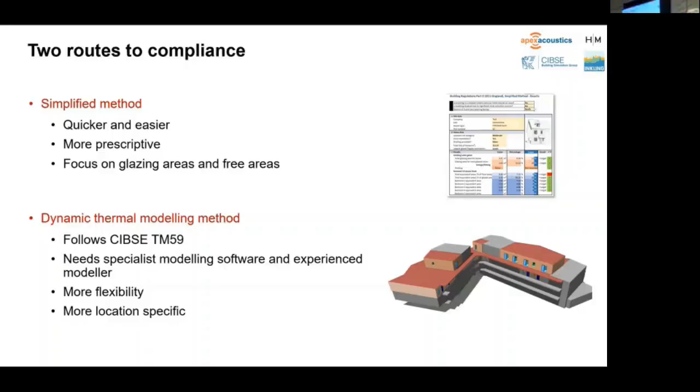The alternative, and we'll cover these in a bit more detail going forward, is the dynamic thermal modelling method, so it follows the CIBSE TM59 protocol. It does need more specialist modelling software and an experienced modeller to run that software, but it affords a lot more flexibility. It's more location specific, and we'll see there's a few other key advantages that come with doing things that way. Obviously, it is potentially a lot more expensive to do those sort of assessments.

There are a number of additional requirements within Part O that I think even as modelers it's really important to be aware of, because they do have an impact on the modelling assessment.

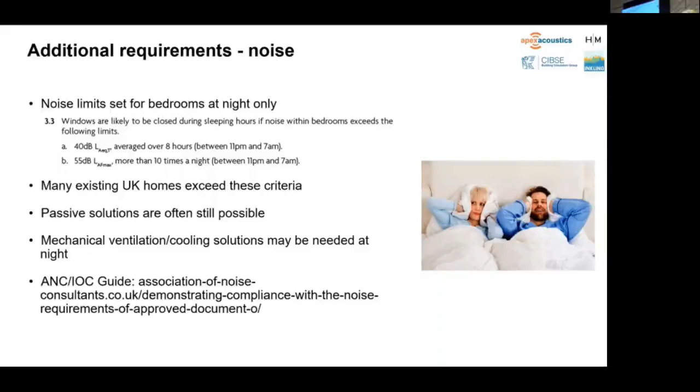On top of the noise, there's additional requirements around security. Windows relied upon for nighttime ventilation need to be secure - that's bedroom windows that are accessible, so ground floor bedroom windows in particular you'll need to pay extra attention to. Likely solutions include fixed lockable louvered shutters, grills, railings and so forth. But as modelers, we need to take into account whether those impact the ventilation potential of those windows - what does that do to the discharge coefficient and so forth. So we need to account for that on windows affected, but it's predominantly just bedroom windows, and I think during the day as well, because they're going to be fixed.

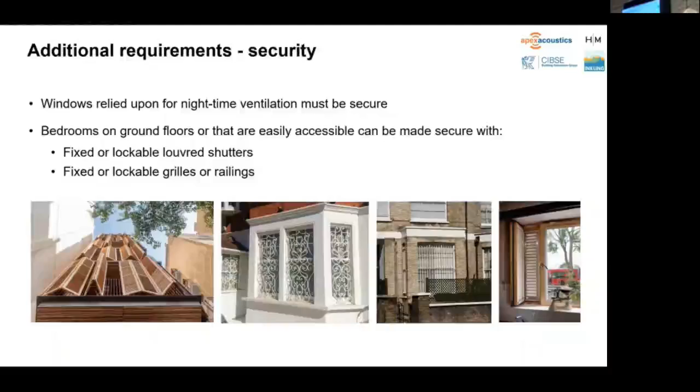Another one on top of all that: protection from falling. With good reason, there are some additional safety requirements, although it's questionable why these are different to what's in Part K, which is traditionally where we keep all the health and safety parts of building regulations - for some reason these supersede Part K. There is a limit on how wide windows can open, including ground floor windows. You need to measure from the inside face of the wall to the handle of the window - it can't exceed 650 millimeters. The window can technically open wider than that, but you can't include in the model or in any of your assessment an opening that would exceed that limit, because it's based on people falling out of the window as they open it too wide or reach to close it. It's well motivated, but fiddly to apply, and I think Ben's going to cover in more detail how we might go about that as modelers, to make sure we capture it for every window.

In addition, this doesn't so much affect the modelling, but is worth flagging to clients: any sill heights lower than 1100 millimeters - and that's going to be quite a lot based on current designs - for upper floor windows, or where the inside to outside height difference is more than 600 mil. The sill height needs to be at least 1100 mil, or there's a tolerance of minus 100 mil if it's a means of escape, because the fire regulations require means of escape to be lower than 1100 - though I keep forgetting the exact numbers. There is a slight tolerance, because the house builders lobbied for it very hard. In addition, you can use guarding - if you've got an opening lower than that, it needs to be guarded to make sure 1100 is the safe limit.

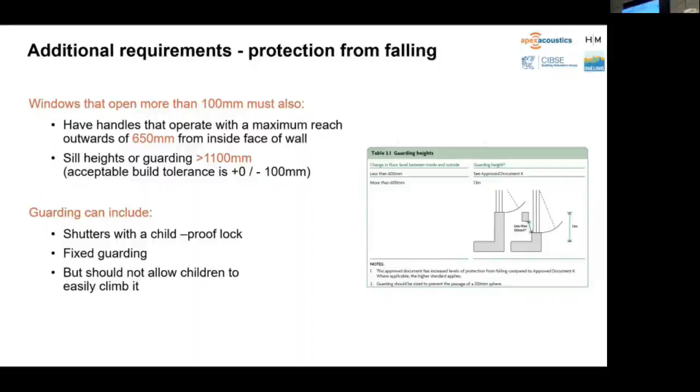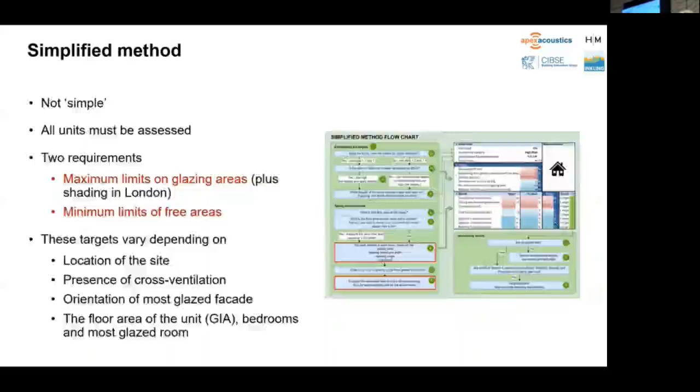So I need to rattle through this, I forgot to set my timer. The simplified method, as I said, it's not that simple - you have to assess every single unit in a scheme. There are two key requirements: a maximum limit on the glazing areas and a minimum limit on the free areas, which vary depending on the location of the site, whether it's cross ventilated, and what orientation your most glazed facade faces, etc. You also need to take quite a lot of detailed measurements for each unit and each window, including the glazed area and the sash area - the pane of the window that opens - how big that is, the floor area of the room, the GIA for the whole house, and so on.

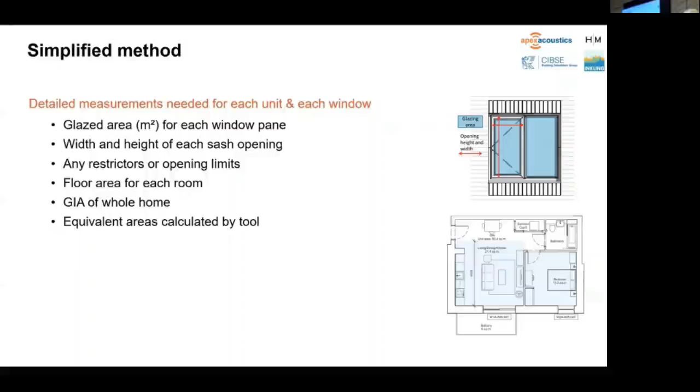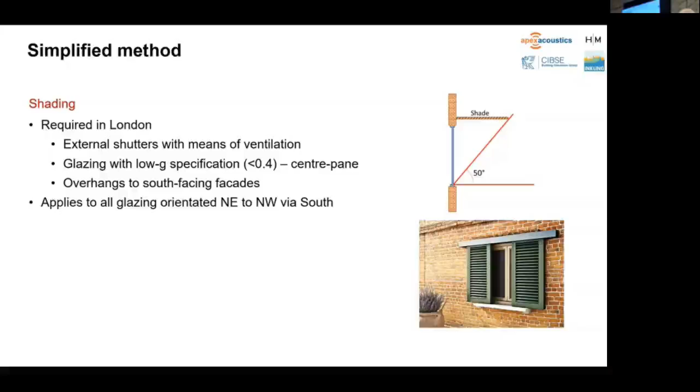The good news is, shading - everything in London needs additional shading under the simplified method, which could be external shutters, low G glass, or an overhang. The good news is the Future Homes Hub have produced a spreadsheet, free to download, that will take you through that calculation step by step, asking all the questions - you fill it in diligently, and it spits out the answers.

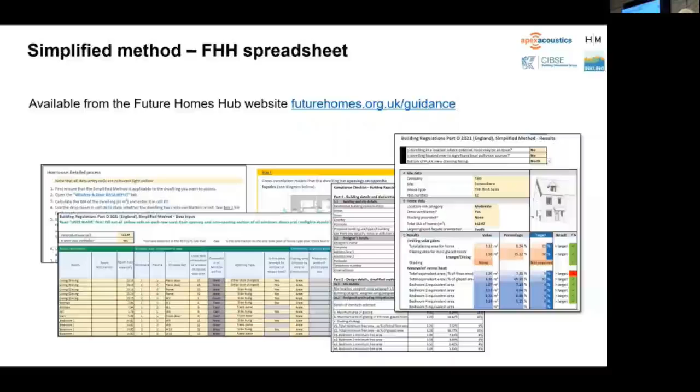And that, as we'll come back to later, has a little calculator that does that 650 mil reach angle check. You can use that to help feed into your dynamic model if you want to, and I advise that you might.

The alternative to the simplified method, and what we're going to talk a bit more about today, is the dynamic thermal modelling method. So that's my bag. I'm a TAS modeller, and I was one of the authors of TM59, so I'm quite embedded in it.

The advantage of using this route through building regs is that you can assess a sample set of units, so you don't have to do every single one. I've got a slide on how you might select that sample sensibly. It's based on CIBSE TM59.

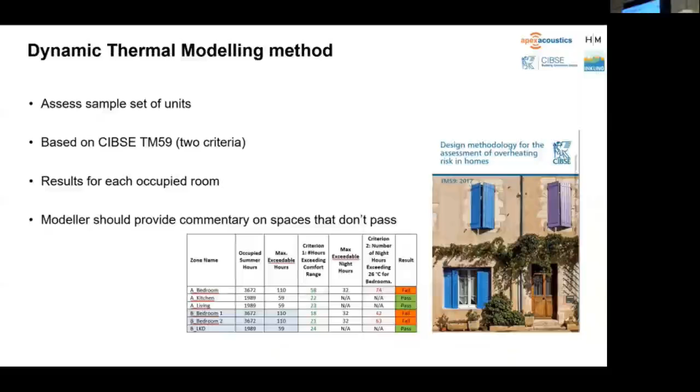There are two criteria. You get results for every occupied room—bedrooms, living rooms, kitchens, etc. As a modeller, you should be providing a commentary on any spaces that don't immediately pass those criteria: which criteria it fails, why that might be, and what mitigations might be suitable to enable a pass.

When it comes to selecting a sample of units—I realise I'm rabbiting on, but we've got a lot to get through—the key thing is to select those that are likely to have the highest risk of overheating.

You're not going to get away with picking all the ones around on the north side of the building that are right near the ground floor and really shaded. That's not cool.

Ideally, you want to be picking one of each unit type: units that have the most solar exposure, the biggest glazing area, or the least shading from surrounding buildings or other features. Also areas that might have constraints to window openings—noise, pollution, whatever reasons you might not want to open windows, security on the ground floor.

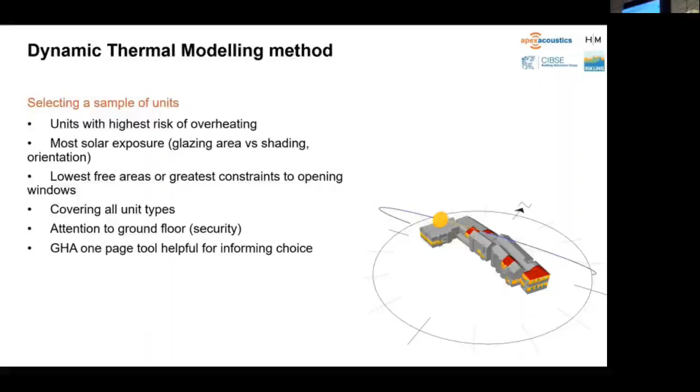There's a Good Homes Alliance one-page tool, again something I've written, which is free to download from their website. It summarises in one page the key risk factors for overheating in homes. If you're unfamiliar with what they are, a quick look through that might help you understand where in a scheme the key risks are, and then help you pick your set of units, flagging up more of those red flags.

Other advantages of using the dynamic thermal modelling method are that you choose weather data local to the site. As anyone who's explored a particular set of units and run them through various different CIBSE weather files will attest, outside of London is way easier to pass than inside of London. There's a really striking difference, which is useful for sites well outside London, but immediately causes an issue, particularly for Heathrow, which is the worst case weather file.

Just for anyone who hasn't already picked that up, Heathrow is a real challenge. You do need to use the CIBSE 2020 high emissions 50th percentile DSY1 file—that's the key one you need to pass against. So again, as modellers, you should be familiar with that and have access to it.

There's a spreadsheet that CIBSE have provided for Part L—if you're in doubt about which is the best weather file to use, you put in the postcode and it tells you what the CIBSE location is. You can download that from their website.

Advantages of the modelling method: natural ventilation is much more accurately reflected using the models. It's not perfect, but it does take into account cross ventilation, the shape of your windows, discharge coefficients, as we'll see, and the local weather file—so on a windier site, you'll get more advantage to opening your windows.

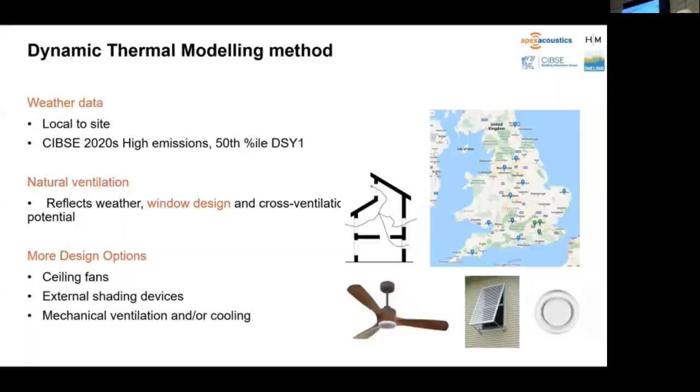Mechanical ventilation and/or cooling in various different guises can be included to model the benefits and effects those could have on the results. So quite a lot of options. In terms of differences between the original TM59, vanilla as we're trying to call it, and the Part O requirements, there are some changes, irritatingly, that they've made.

Mostly around window openings. Now they've required that windows open gradually when internal temperatures exceed 22 degrees, windows start to open, and they're not fully open until internal temperatures are above 26 degrees. They've also required that bedroom windows are open all night if the bedroom exceeds 23 degrees at 11 p.m.

And until recently, we couldn't actually do that in a lot of models. So I don't know how they tested it, but now that's been implemented - I know TAS and IES have implemented that, so it's possible.

It does some weird things to results, but you can sort of see the logic there. People are going to bed, they don't want to wake up in the night to alter the windows, but I think it's arguable that if you were hot in the night, you might get up and open the window.

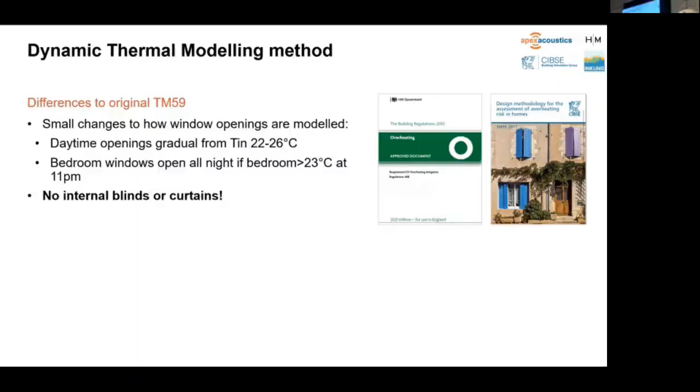It's either way. But the really big hitter here is that the approved document does not allow you to include blinds or curtains in your model, and that historically, particularly in London sites, was one of the big last resort things - you could add in some internal blinds, and yes, you had to include them in the build, but they would help you pass your TM59 assessment. No longer. So this is going to be a challenge.

I'm nearly finished. Whatever method you follow, simplified or dynamic, there are reporting requirements that need to go to building control. The Future Homes Hub spreadsheet has a template inside it for the simplified method results, so that helps you populate. But if you're using the dynamic modelling route, you need to complete a proper modelling report. There's a list of what needs to be included inside it, and that has to go to building control together with your results.

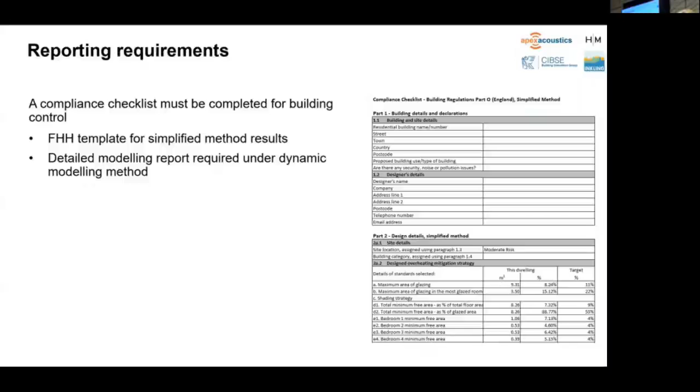So, which method? It's a balance. The simplified method does have some advantages, but what I'm finding as I'm applying it is that there's quite a narrow band with which you can comply. There's a real narrow sweet spot between having too much glazing and not enough free area, that it is quite challenging.

So I think a lot of house builders are running their standard units through the simplified method and going, oh, it fails. Do I want to make loads of changes to it, or do I want to run it through the dynamic modelling method? Let's try the dynamic modelling method and see if we can get past there. Often they can.

So I think there's a lot of work out there for modelers, which could be a really good thing, but we're going to have to really get our act together, be consistent, do a really good job on these models and make sure that we're doing them right. So hence this talk today. So pros and cons to both, but I would argue that we're going to see a lot more modelling, and that's not just my bias.

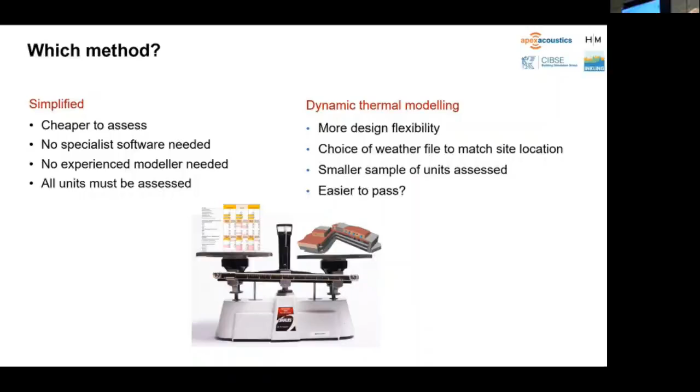There are a lot of resources, and it's building - there's going to be more and more out there to help you. The Good Homes Alliance early stage tool that I mentioned before, free to download. CIBSE TM59 you can get from the CIBSE website. The Future Homes Hub guidance - I wrote with Julie Godefroy a couple of pieces for them that are, again, free to download, technical guidance that takes you through the nitty-gritty, mostly the simplified method because it's for house builders, but it does cover TM59 as well, and all the detail of what you need to do.

Jack's guidance, which he will come to later as well, on acoustic and how you measure the noise on site and how you respond to that. There are FAQs on the DLUHC website, where they've published the building regs. We're not convinced they're the questions most frequently asked, but they do augment some of the guidance in the approved document, which is very scant. And I've written a number of blogs now for the Inkling website, so check us out. There will be a fourth coming quite soon with some of the content from today.

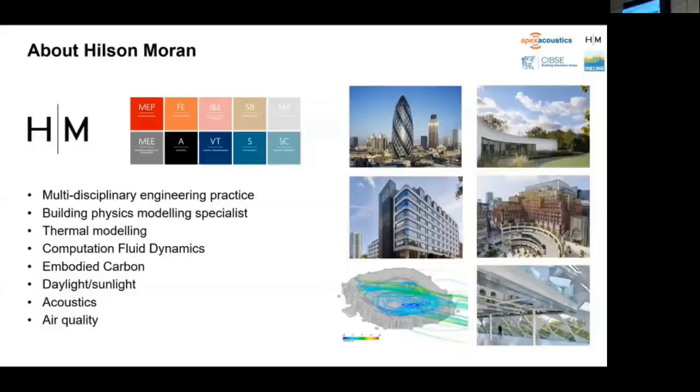What I want to cover today is, I think one of the important bits, is how we model the openings in our buildings, how we model the windows, and how we get some consistency, because there are many approaches you could take. There are many inputs in the modelling tools, and there are many ways that you could come up with different answers, whether they're right or wrong. I think it's important as a community that we try and come up with either a standardised approach, or an approach that we can all agree on.

So I'm going to go through some of that and give our collective opinion. Me, Susie, and Jack have been mulling this over for a week or two at least, trying to come up with what we think is a sensible way forward.

The first thing to look at is the fact that there are many definitions for what we call the opening bit of the window. So we have free area, equivalent area, and effective area as the three key terms. Depending where you look, you'll get different definitions, even between the building regulations - even between Part O and Part F there are differences. And if you look wider, there are many papers written on this subject, so it's very confusing.

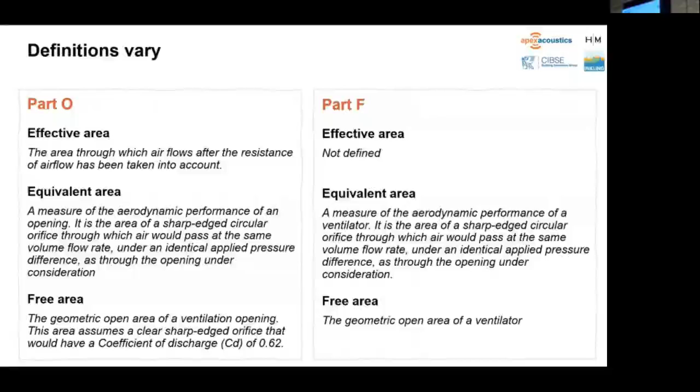As a community, we want to really work out how we should best approach this. So I'm going to quickly spin through these, outline them, and then go through what we think is a sensible approach for our modelling inputs.

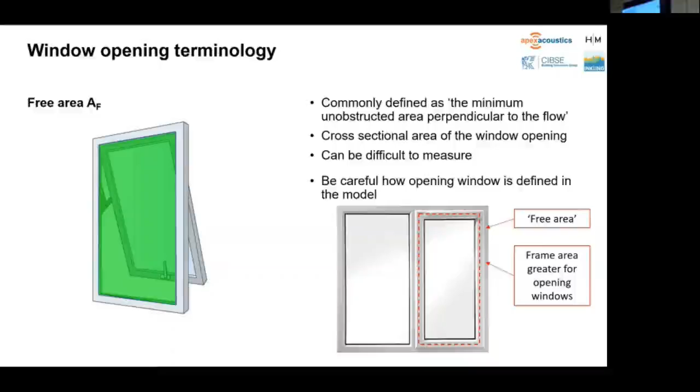Free area is literally the hole - not the bit around it. It's, you know, when you open the window, it's the whole bit. And that's very often difficult - people define it different ways. But also the thing to think about is it is the hole. So when you open a window, as in that image on the bottom right, the sash area, when you open that you'll have some frame that overhangs the hole. So when you are entering that into your model, what do you put? Because your window in your model might be the pane and the frame, and the opening bit might just be the pane bit. So you have to think carefully how we input the data into the model to correctly represent free area.

The next thing we look at is effective area. Effective area is that free area times the discharge coefficient. The discharge coefficient is just a way of looking at the aerodynamic interference that all the bits of the window contribute to air coming in through that hole - whether it's a top hung window, side hung, etc., and they will perform differently for different types of window. So the discharge coefficient has to be calculated for each window type, for each opening angle setting for your window. It's very difficult, on the face of it, to work out what that discharge coefficient might be, so you have to do it via experiment. From that graph, you can see it varies for different opening angles, for different ratios of width and height of that window. They all tend, when you get to a fully open hole, to a discharge coefficient of about 0.61 - that's the accepted norm around that value. So whether it's a square, a rectangle, or even a circular hole, they will tend to that sort of value. But as you move away from that, it varies, and you need to come at that by experimentation.

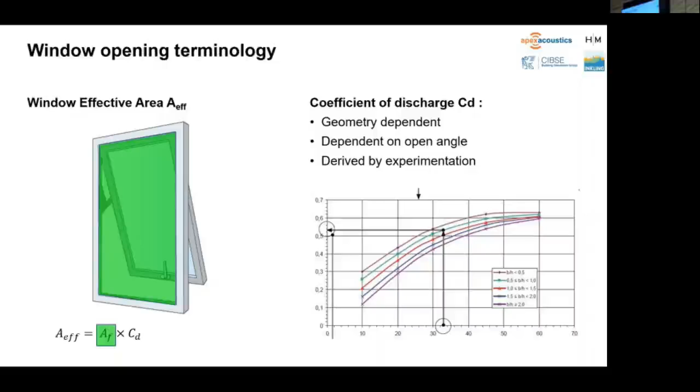So equivalent area is just an extension of effective area - you're dividing your effective area by that maximum discharge coefficient of 0.61. But an interesting point is that Part O actually says, when it says free area, it's actually talking about equivalent area. So it's confusing even within Part O what free area actually means. We need to generate some clarity about what terminologies we're using where, what they actually mean, and what value you use for that in your model.

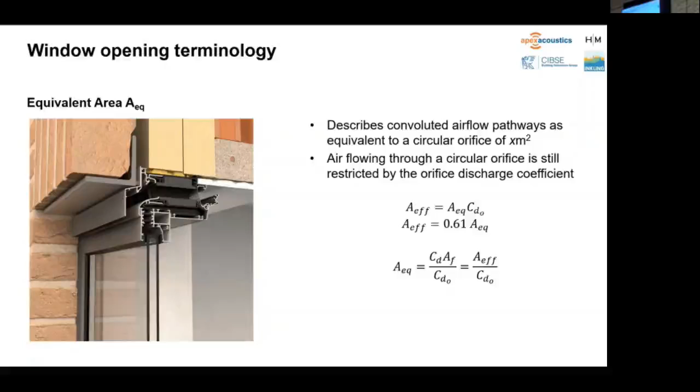So there's a great little tool on the government website under the Building Bulletin 101 schools calculation tool. It's a little coefficient calculator. So you put in the width and height - the yellow ones at the top are your entry boxes. So width and height of your opening, the opening angle of your window. Obviously, if it's a sliding window or something like that, you'd put 90 degrees, it's fully open, and that generates your equivalent, your effective area, and your free area, which is obviously just width and height, but it also calculates the discharge coefficient for you.

In discussion, we've come to the conclusion that free area and discharge coefficient are probably the most pertinent figures to use in your models, because equivalent area and effective area can be misinterpreted, whereas free area is fairly easy to measure - you just measure the size of the opening, and the discharge coefficient is spat out from this. I would say this tool is basic, but there is work going on to improve it to get better accuracy.

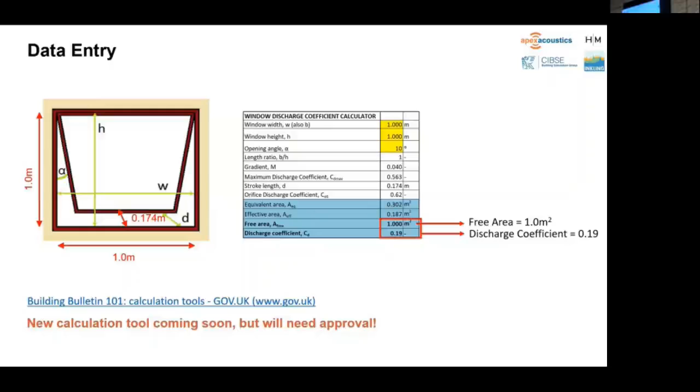The other advantage is if you use discharge coefficient and free area, that is common in all three modelling tools you can use. TAS, IES, Design Builder all have discharge coefficient - they all call it discharge coefficient. They all have something which is effectively the free area: TAS calls it a factor, IES calls it an openable area, Design Builder calls it glazing area opens, but effectively that's your free area.

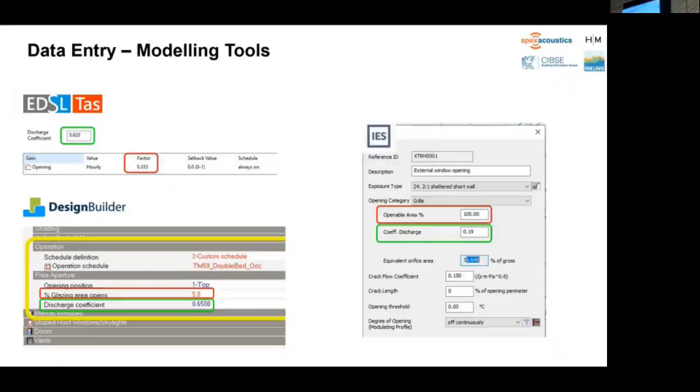Most of the tools have other options, but there's other stuff behind that - in IES there are many options, you can select different window types, and there's probably good research behind all that, but it's not quite as transparent as this. So in terms of consistency and variation between modelling tools, we think that having an openable area and discharge coefficient is the most transparent way of doing that.

And I said there was some research going on. Patrick Sharp and others at Nottingham, Ben Jones and Chris Iddon and others who are known to the building simulation community have published an excellent paper on this, looking at developing a better model for window opening. They've taken the standard BB101 calculator I've just shown you, done some other physical tests and modelling, and come up with this statistical effective area modelling tool, SEAM, which is getting much better correlation, much less error in its prediction of window openings.

At the moment, this isn't an official tool - unlike the BB101 calculator, which is on the government website, this tool isn't released yet. But obviously if we have something that's a bit more accurate, it'd be great to get that officially stamped so we can use it. If you're interested in this, that paper is excellent and goes into all this detail.

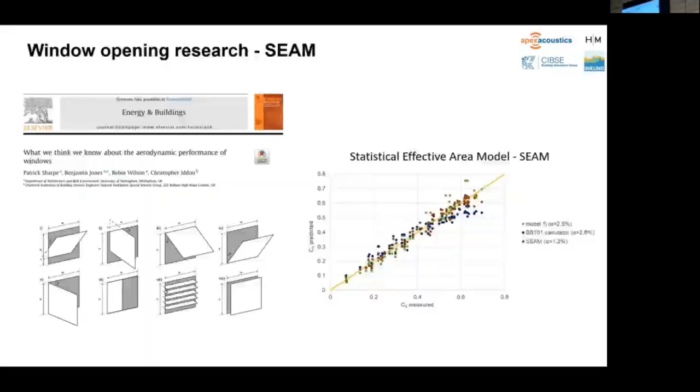And to pick up on Susie's point, we don't want people falling out of windows - there is that 650 limit, so when you're doing your calculations, make sure you take account of that. Susie also mentioned that in the Future Homes Hub there is a spreadsheet which also calculates discharge coefficient for you. It takes into account all those factors, making sure that 650 reach is complied with, and it works out for both day and nighttime conditions. So that's another resource - you want to double check you've calculated discharge coefficient correctly from the BB101. It's a similar tool, it will also help you look at that.

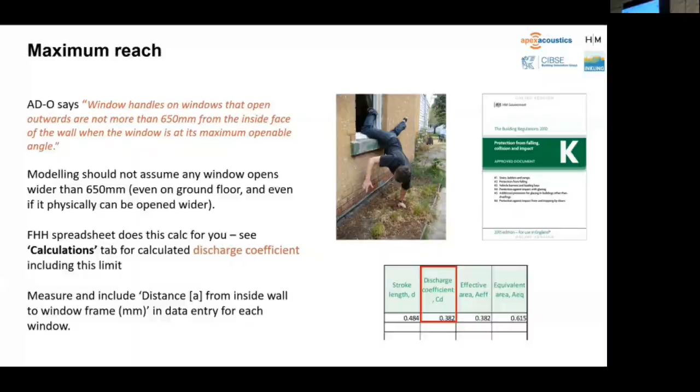Jack will cover this in more detail, but obviously with noise exceedance, you can do your modelling with your window openings, but you still have to comply with noise criteria. Nighttime is the key one - make sure you talk to your acoustic consultant and work with them in tandem. I think gone are the days where you could do overheating assessment with the windows open and submit your acoustic report with the windows closed, and they would both get ticked off. Most local authorities are wise to that now, and that's not the sort of practice we want to encourage anyway.

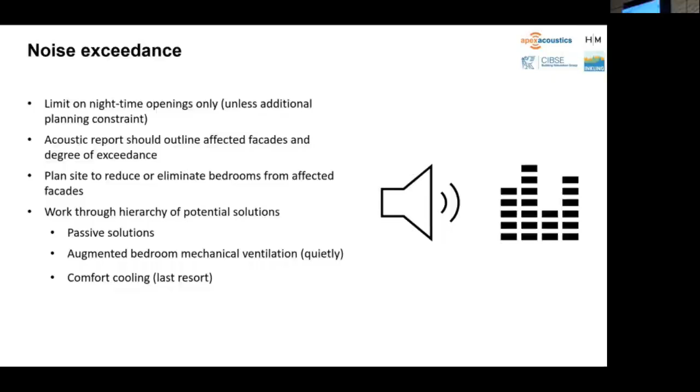So we want to do all that, and just looking through the hierarchy of stuff: passive first, adding additional mechanical vent where you can't quite get that, and then resorting to comfort cooling as a last resort.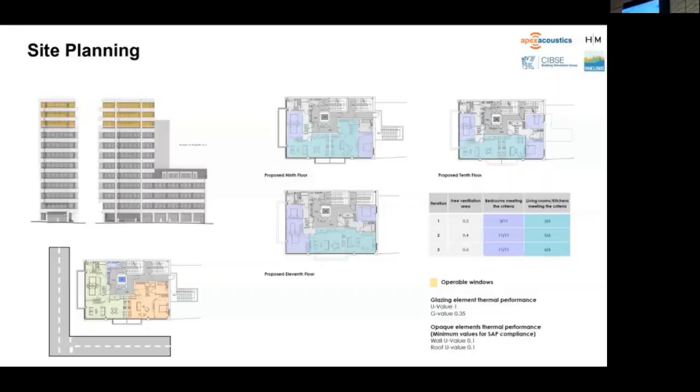If we do have to go to comfort cooling, what we've been looking at recently in another project is, can we offset some of that heat? So in this case, we're using the rejected heat from the space. We're taking the heat from the space and using that to heat our hot water, which is better than dumping it to atmosphere. So you're actually getting a benefit.

Again, that sort of area in building regs is a bit unclear about how that crosses over, because you're taking useful heat from the flat and translating it into your hot water. Hot water is always needed.

The things to look at here: we've used a more realistic hot water profile than you'll see in your NCM internal conditions, and also matching the loads. But also, if you're using the TM59 internal gains, which were designed for stress testing a passive design, that might not be appropriate for sizing your hot water, because it might give you an overestimation of the hot water load you might derive from that shift of heat from the space to your hot water.

So the process you should go through is: test that passively first, see how far you can push the apartment before you start moving towards comfort cooling or something like this, where you're trying to load shift heat away from the space into another use.

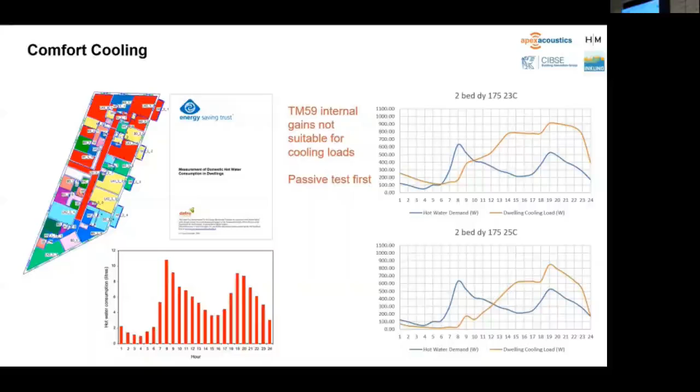Hi, thank you, Susie and Ben, for the invitation here as well. So, my name is Jack Harvie-Clark. I'm the founder of Apex Acoustics. We started just me, we're now 25 people. We do acoustics and air quality. Offices in London, Midlands, North East and Manchester.

This question of noise and overheating, and noise and ventilation, is something that I started nearly a decade ago when I wrote a conference paper about it. Because, as Ben mentioned, we used to do acoustics entirely separately from how ventilation was considered or mitigating overheating. Trying to integrate those things together is a difficult and painful journey that we're all on now together. So, not to share the pain, but to share the difficulties we're facing.

One of the key difficulties is how we describe the performance of the facade. Ben's been talking about the openings for the ventilation performance, and I'm going to talk about how we understand those openings for acoustic performance. And you'll see, hopefully, why it's so important that we make the same assumptions about what the facade is, how it's performing, what an open window is, because it's not easy to understand.

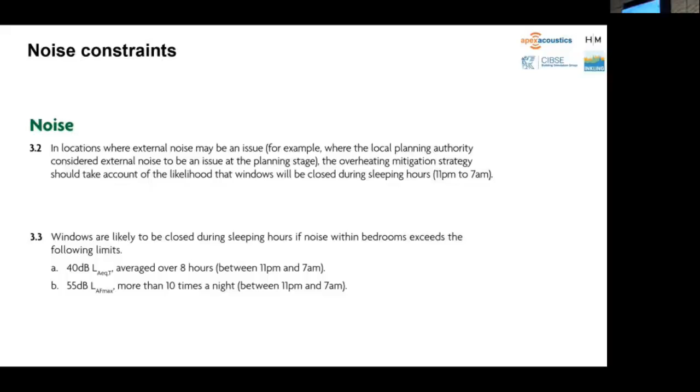This is the key paragraph in the approved documents. If noise exceeds these limits, then we can't assume that windows are open to mitigate overheating. So these numbers, 40 dB as an average over the night time and 55 dB LAF max, not exceeded more than 10 times, are 10 dB higher than the normal levels that we design for with windows closed. So this represents a tolerance on the normal levels to enable natural ventilation to mitigate overheating. Otherwise, if we didn't have that tolerance, there would be very, very few places we could rely on opening windows to mitigate overheating.

One of the things we're saying in the guide is that we want to agree we can demonstrate compliance by design. Nobody wants to rely on testing the building when it's completed to demonstrate compliance, because that invokes a whole lot of other risks. Contractors hate doing that, of course, as well. But in the same way, your thermal model demonstrates compliance by design. So we want to demonstrate compliance with the acoustics by design as well.

We talk about things like the types of noise that are considered. You don't want to fail the building regulations because your neighbour's dog barks. So we rule out things like natural sounds—sounds from the weather, the wind and the rain, sounds from wild animals. We rule those things out, and it's just the anthropogenic sources of noise—noise from people and people's activity, which is mostly transportation, but it could also be industrial sources.

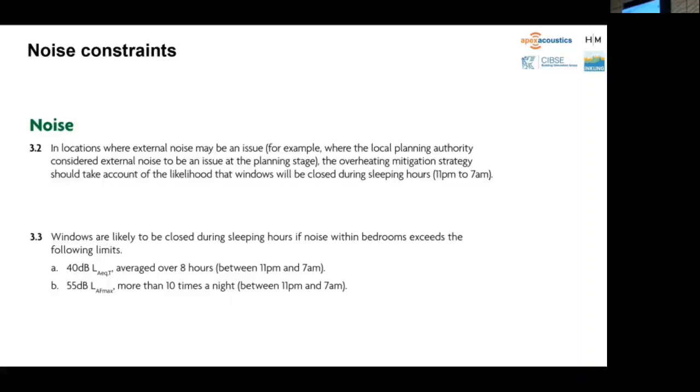As Ben mentioned, everywhere in the approved document where it says minimum free area, it means minimum equivalent area, because you have to calculate the equivalent area of your partially open window, and that has to be more than the minimum free area. So it would be much clearer if they just said minimum equivalent area rather than minimum free area. But this is clarified in one of the FAQs—they really do mean equivalent area. So their definition of free area in approved document O is the definition of equivalent area.

So don't confuse the width times height of the opening with the free area that you have to achieve in approved document O. There is a link to the discharge coefficient calculator that Ben was talking about, linked in the approved document. So it is an official resource, if you like, for doing this—you don't have to find it yourself. The link's there, and that's a little spreadsheet, because you can't calculate the equivalent area by measuring the size of your window. You have to calculate it from the empirical data, as Ben mentioned.

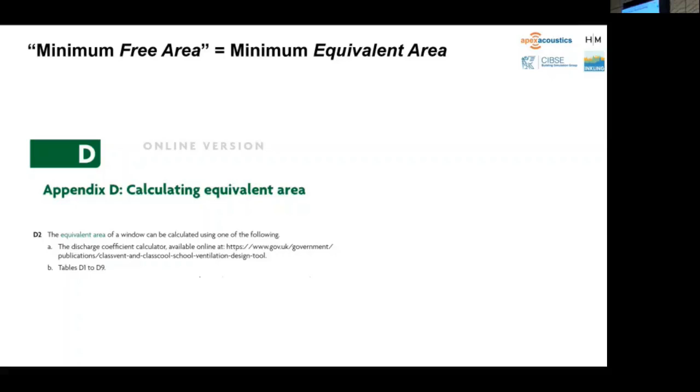So how are we going to understand this open area for its acoustic performance? We've got a window open to some number of degrees. We can calculate its equivalent area, so its ventilation performance, and we want to calculate its acoustic performance as well. There is a little bit of test data available out there, but not very much for partially open windows. So we've invented another term, the acoustic open area. I'm sorry, bear with me, it's worth it, because if we didn't do that, this would be much, much trickier. So the acoustic open area is the smaller, the way we're describing it, of either the area of these triangles—the rectangle and the triangles, if the window's open to a small extent—or the width times height.

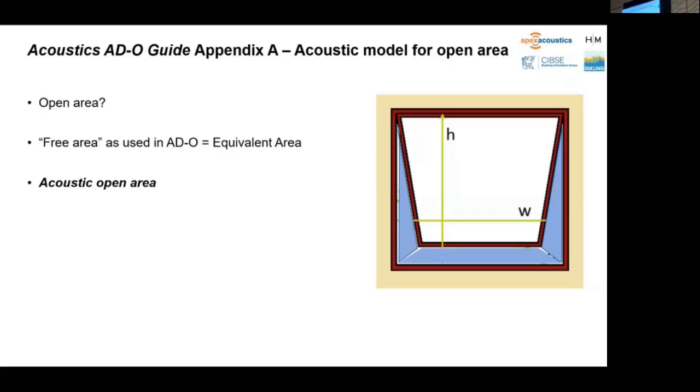So this is considering the acoustic open area as an element with 0 sound reduction index. There's very good reasons for doing that, which I'll show you. So this standard tells us how we calculate the sound ingress through an element from the sound outside, and some details in the annex say for openings you can make these assumptions. And what this means is that's an element with 0 sound reduction. So this is a very useful note in the standard that we're making use of here.

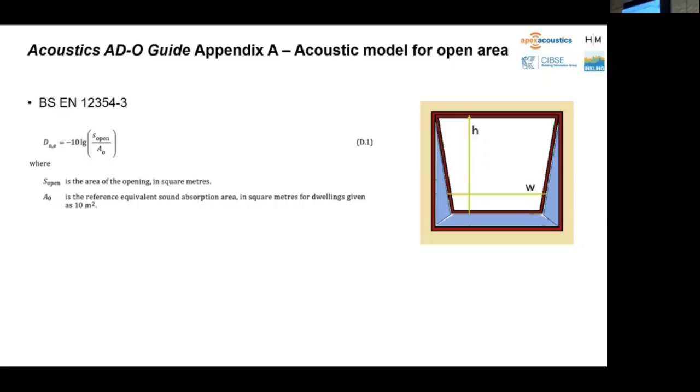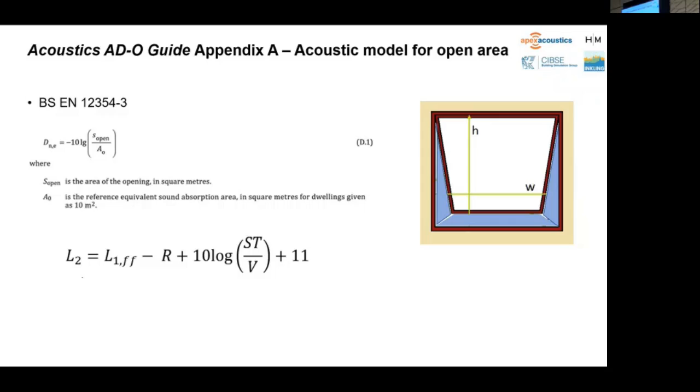That's the equation for calculating the noise through an element. The advantage of doing this is that if we make assumptions about the relationship between the acoustic free area and the floor area, then those variables drop out of the equation. And if we make an assumption about the room height, then all the variables drop out, and the level difference from inside to outside is simply a function of the acoustic free area divided by the floor area. If your acoustic free area is 5% of the floor area, which is probably what you need to get an equivalent area of 4% when your window's open 60 degrees, the level difference between outside and inside is 9 dB, irrespective of your room size. So you don't have to do a different calculation for every different size room. That's the advantage of doing this.

So in the simplified method, we can say the difference between the inside and the outside level—it's reasonable to assume 9 dB. So we can measure the outside noise level, or model the outside noise level, and work out if the simplified method can be used acoustically based on that opening. So that was a bit of a journey.

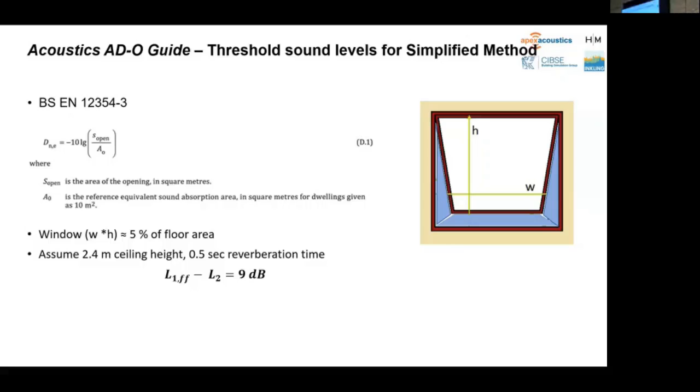So that's for moderate risk areas. In London, because you have to have 13% of the floor area to be the equivalent area, that level difference between outside and inside drops to 4 dB. So it's noisier, and if you're trying to use the simplified method, you have to assume a smaller level difference from outside to inside.

So there's even less chance the simplified method is going to work at all. So we can use the spreadsheet on the government website to calculate equivalent area based on angle of opening. So this is for a window with a 1-to-1 aspect ratio. You get slightly different graph shapes if the aspect ratio is different.

So what this shows here, this is the equivalent area, the angle of opening on the bottom and the area on the side. The orange line shows how the equivalent area increases with open angle, and the blue line shows how the acoustic open area increases until it's slightly over 30 degrees. So when the window is open 30 degrees, if it has a 1-to-1 aspect ratio, the area of that blue triangle, blue rectangle and the blue triangles on the side is equal to the width times height.

It might have been a smaller angle than you might have thought, but so we're saying the acoustic open area can't be any bigger. Your area that's open for the sound, it can't be any bigger than the width times height.

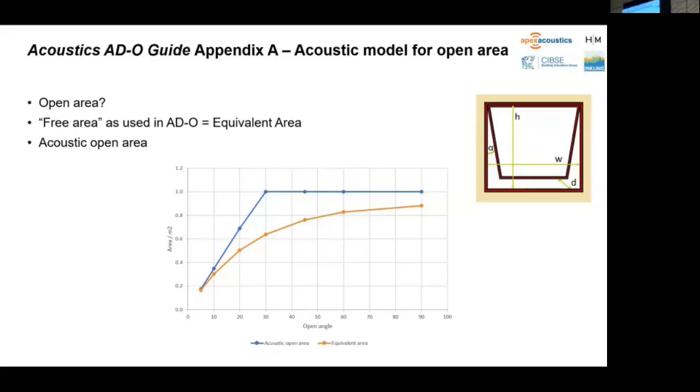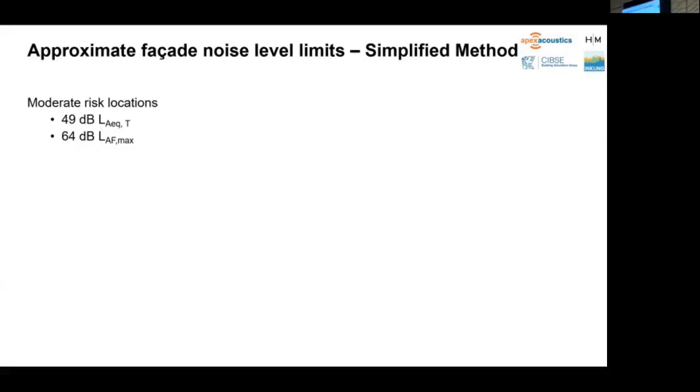So that brings us to these numbers for moderate risk locations everywhere outside London for using the simplified method. So this is an acoustic constraint to using the simplified method, these noise levels. I'll skip over that bit.

There's a question then, to how many properties is this going to affect? I'm not going to be able to rely on using the simplified method because of the noise. So the last time there was a big national noise incidence study was about 20 years ago, where noise was measured outside people's houses all over the country. And they characterized those types of locations as rural, semi-rural, urban, suburban, and just think how many people are affected by what levels of noise.

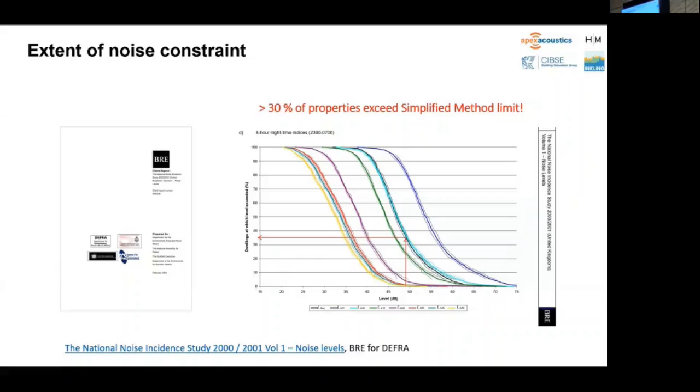Lots and lots of graphs, but one of them looks like this. So at 49 dB for night, you can see that somewhere between 30 and 40% of people are exposed to higher noise levels than that at night. This means that more than 30% of existing properties would not comply with using the simplified method because of the noise. So almost everywhere, if you're on a site that's exposed to any sort of noise, the simplified method is not going to be feasible because of the extent of opening that you have to assume.

So what the FAQs allow us to do is assume that the window is partially open at night. So this is a contradiction to what it says in the approved document. In the approved document, it says if you're doing dynamic thermal modelling, assume the windows are fully open. And rather than change the approved document, they just issued an FAQ which says actually you can model the windows as partially open at night.

So this is vital for the noise because you often, in many locations and for many designs, you don't need that bigger open area at night. So the simplified method is meant to be a robust tool, but if the overheating risk isn't that big, a much smaller window opening at night can be sufficient to mitigate overheating, because obviously you need much less airflow at night to mitigate overheating than you do in the day.

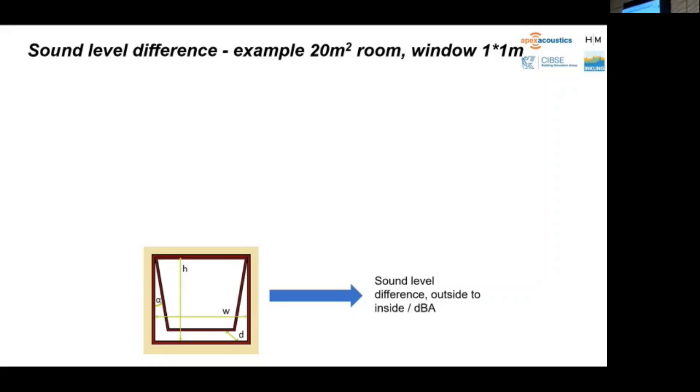We can calculate the level difference from outside to inside you get using the acoustic open area. So this graph is showing the level difference across here. So it starts at this point with the simplified method. So this is a level difference of 9 dB when, in this example, it's a 20 square meter room with a window that's 1 meter square.

So that's 5% of the floor area. So the equivalent area is about 0.64 when it's fully open. Oh, sorry, when it's open to just over 30 degrees.

So this is the opening angle on this axis in green. So this is the opening angle here, and the equivalent area is shown in the blue line here. So as you close the window, then the level difference from outside to inside increases as you move across to the right, and the equivalent area decreases. So the ventilation performance of your window decreases, which is what you would imagine.

Rather than equivalent area being the exchange token between us acousticians and you thermal modelers, we think discharge coefficient might be better. So this is exactly the same information, but with discharge coefficient on the left-hand side. This is because your models ask you for width times height of the opening and the discharge coefficient. So if we tell you the discharge coefficient, this is based on an assumption about the angle of opening of a window.

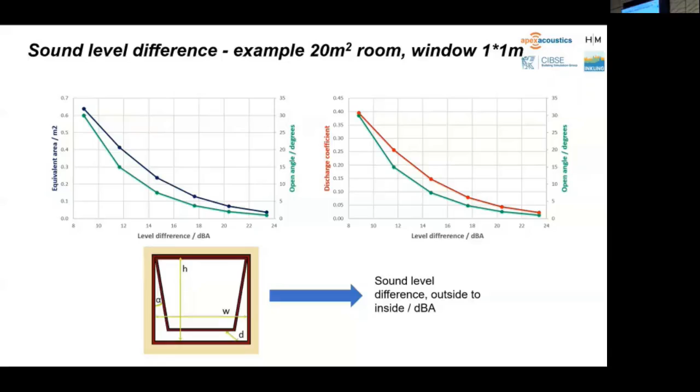So what do we do if we can't use the simplified method? At those noise levels, if the noise is less than that, you can use the simplified method if you want, but you don't have to — there's no noise constraint to using the simplified method. Above those noise levels, you need to use the graph from the previous slide with TM59 to investigate whether a reduced opening at night allows sufficient airflow to mitigate overheating while complying with the noise level limits.

So there's what I call a window of opportunity there to still rely on opening windows. Above that, one of the design responses, instead of thinking your model has told you it's failed, is to mitigate the overheating risk so you need less airflow to mitigate overheating — nothing to do with the noise or airflow performance, but the other aspects of the design. That's another way you might get the constraint on the opening area to work thermally.

The only other option to use passive means or natural ventilation is to use attenuated openings, or to attenuate the noise on the facade somehow. I've got some examples of what they might be. Otherwise, of course, you're moving into mechanical ventilation, or as a last resort, obviously mechanical.

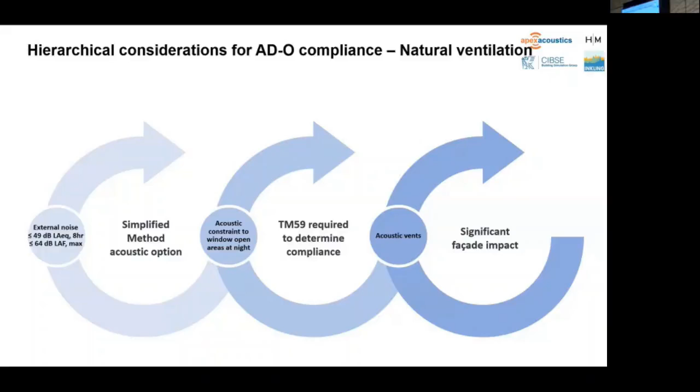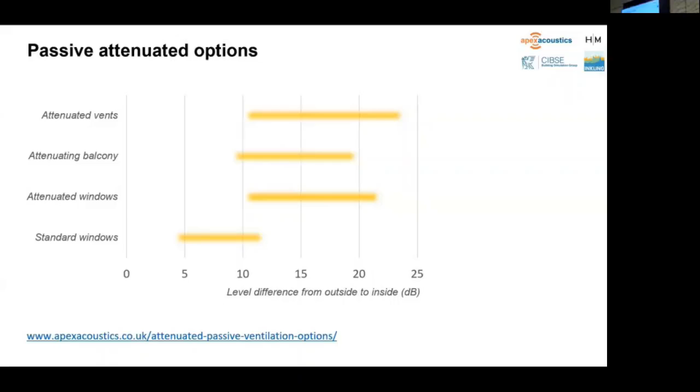We've spent quite a lot of time gathering evidence on passive attenuated openings from research around the world. I'll give you the numbers on this slide — though this is probably a bit optimistic, actually; the opportunities aren't as good as they look here, I now think.

So there are things like this called plenum windows. This is Danish research in response to Danish regulations, where they have to have 0.35 square meters of what they call free area. This gives you much better sound insulation, but you can see, from the open areas you need, this is very unlikely to be enough to mitigate overheating — unlikely to be a useful solution here.

These type of designs you might have come across are the HafenCity windows. They're a German design, developed in response to German regulations, which I think say you have to be able to open the window 100 millimeters. They're two sets of windows, giving you a convoluted air path between them, so you get very good sound insulation but very little airflow. Again, they're unlikely to be a solution to mitigate overheating while meeting TM59.

So when I say they're unlikely to work alone — if you put them together with a mechanical extract fan or something like that, these types of things could be the air inlet path, or you could just have an attenuated vent, which would be a simpler way of doing that if you have mechanical extract ventilation, for example.

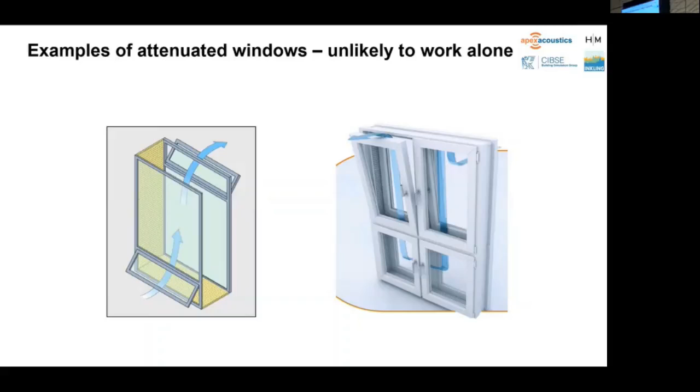This is a similar type of arrangement, developed in Hong Kong for a public housing program, and you only get a small acoustic advantage, and they don't work that well for ventilation. So the answer is it's very difficult to do anything basically better than an open window that allows more airflow but doesn't let the noise in.

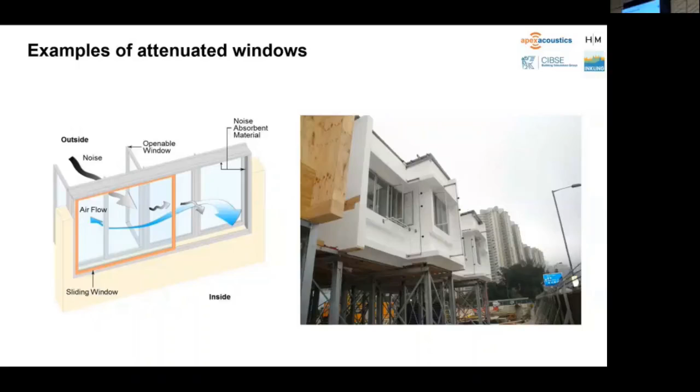You can use balconies to some extent, but you have to be careful you don't make the sound on the facade worse by reflecting sound back onto it. I'm not sure there are many examples of this ever being done in practice yet, but theoretically it's possible.

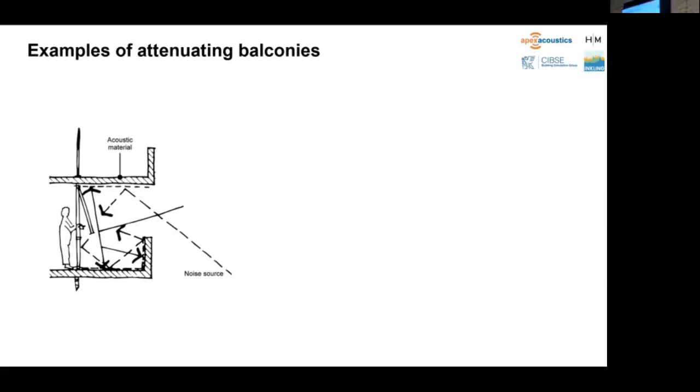You need sound absorbent materials on your balcony soffit. I've never actually seen that in practice, where you can start designing your balconies like this to have a convoluted air path through large openings to let the air through. But then you're starting to design your whole facade around the attenuated airflow. On some designs that might be appropriate, but often that's not really the job we're asked to do.

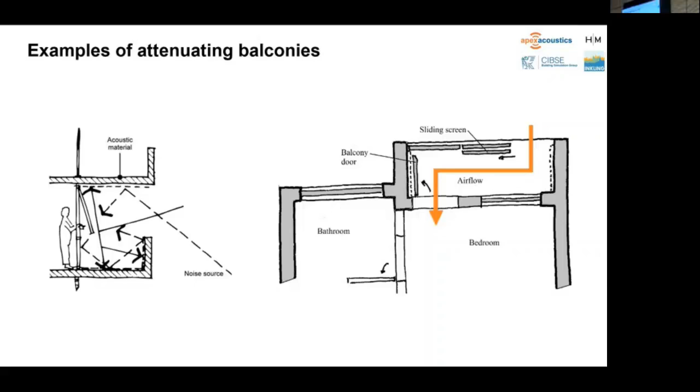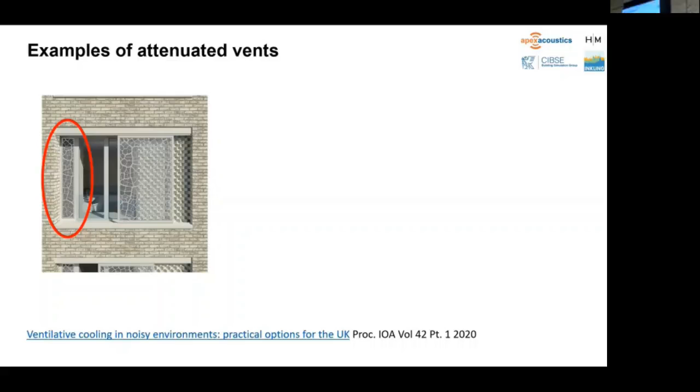So attenuated vents might have a role, and this is an example of one that was designed and built before TM59 was written, or designed before TM59 was written and built after it. So that section of the window reveal has an attenuated vent behind it, and inside the room it looks like that - it's part of the wall.

This attenuated vent sounds like it might be a simple thing, but it's got a damper externally, which when closed needs to maintain the air tightness and the thermal envelope of the external wall. When it's open, it needs to let the air through but attenuate the noise. So there's an electrically operated damper and then an attenuator.

Because of that, the equivalent area of things like this tends to be about one-fifth of the physical size of it. So that's like having a window that's one-fifth of the size of that unit, where you think, well, that's not going to mitigate my overheating very well.

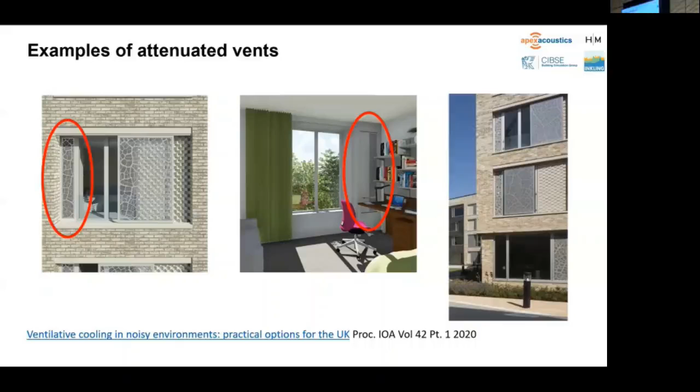It might be enough to mitigate overheating at night, because you probably need less ventilation at night. So this wouldn't pass TM59, I don't think, for the daytime operation. And it's been built - it's got external solar shading as well.

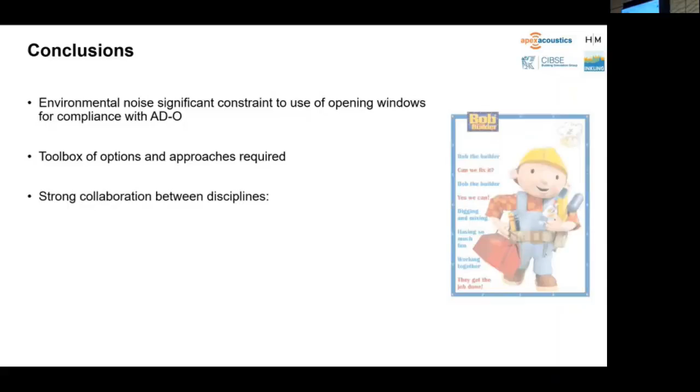So the conclusion is there's got very significant constraints from noise to using opening windows. You need to understand them early on, and you need a toolbox of options and approaches. It's vital that we talk the same language for the opening - who knew that an opening window was such a complicated thing to describe? We need strong collaboration between our disciplines.

And we need this consistent description of the facade opening. Although this is a building regulation requirement, people need to know about this pre-planning because it affects the facade design.

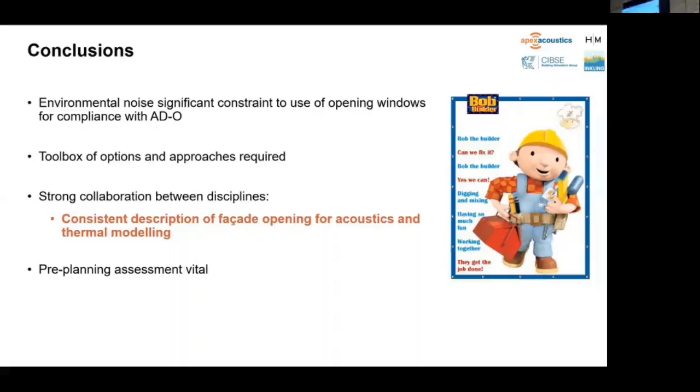So I hope that wasn't too painful - not too much acoustics in there. Thank you all.

So there are some questions that came from the chat, but before I go to that, I have a very open-ended generic question. With last summer's extreme temperatures and heat waves, I think these kinds of regulations are essential. So my question is: do we think Part O is more difficult compared to TM59? Do we think it's going the right way? And a difficult question as well - do we think building regulation reviewers are ready to receive all these reports from us? Do they know how to review them? I don't know, Ben, Susie, whoever wants to take this one.

Yeah, good question. I think the Part O version of TM59 will be harder, mostly because of the blinds, but also to do with the window opening regimes and the strictness on those. I don't think there's a massive difference, but the blinds make it that crunch bit, whereas previously TM59 was best practice, and if there was just one or two hours over the limit at the end of the assessment, you could make a call and say to the client, look, we've done everything we can, it's just one or two hours in these units, it's probably not that big a deal. We can't do that with building regs - you have to comply, it's an end of, must pass. I did discuss this with DLUHC and they were adamant. So I think that's going to be the challenge, particularly for some of the London weather files, like I said.